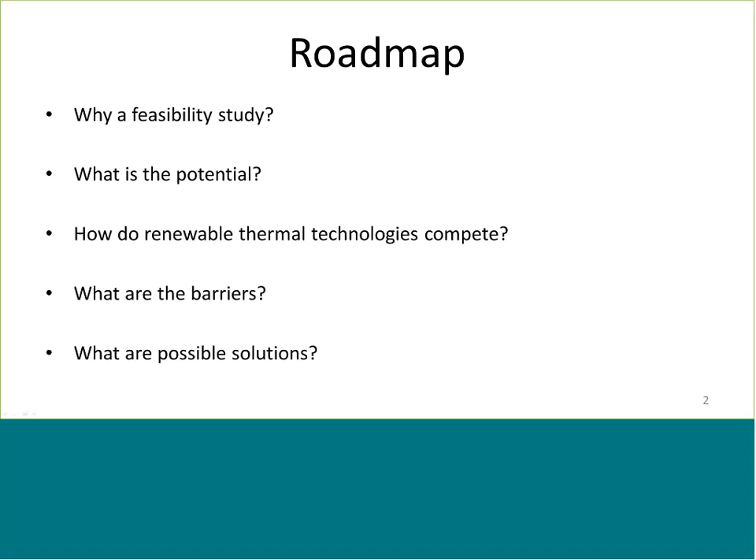This is an overview of the different aspects of the study, and I will walk you through the three parts. So the first part of the study was to estimate the technical potential. How big is the thermal demand today and projected till 2050? In other words, trying to estimate the size of the cake to be shared among the different thermal technologies.

The second part is estimating the economic potential. Letting the thermal technologies compete and figuring out which are most competitive from an economic perspective, and what is economically feasible given this competition analysis. And we have included 7 different customer categories into this analysis.

And in addition to that, we have tried to map different barriers and drivers that can restrict the economic potential. These are both economic but also non-economic barriers. And just to say where the reports are oriented, the quantitative part of the study is documented through the market potential report, and the barriers and drivers are documented through the field study report.

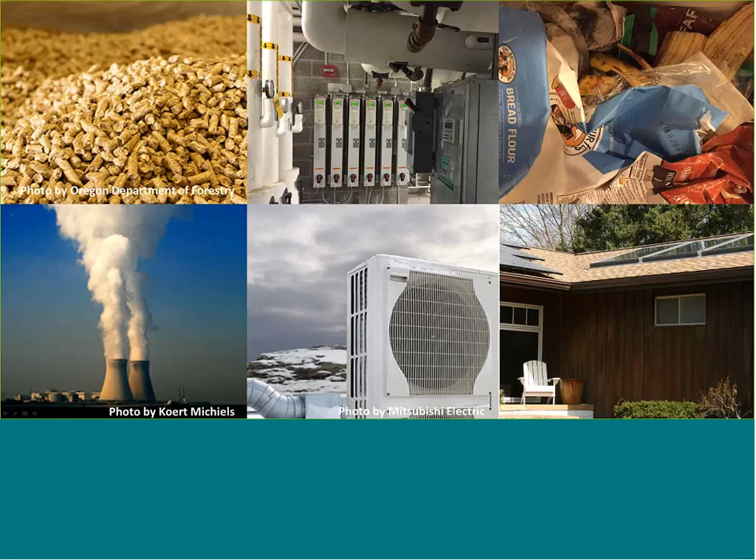The technologies that we have included in our case studies include air source heat pumps for space heating and cooling, both with and without costs of ductwork. We have included air source heat pump water heaters. We have included ground source heat pumps for space heating and cooling, solar thermal for hot water supply, and biomass represented by pellets.

In the project, we have defined renewable thermal technologies as technologies that harness renewable sources to provide heating and cooling services. This means that other solutions than those that we have included in the competition analysis are also available. And I would like to say a few words on that.

Our analysis has focused on decentralized solutions, but I would also mention that thermal grids represent an opportunity for further studies and deployment strategies. That's why I also included waste as an example in these pictures, and also power generation. Because thermal loops could facilitate the utilization of waste heat from waste incineration and industrial processes.

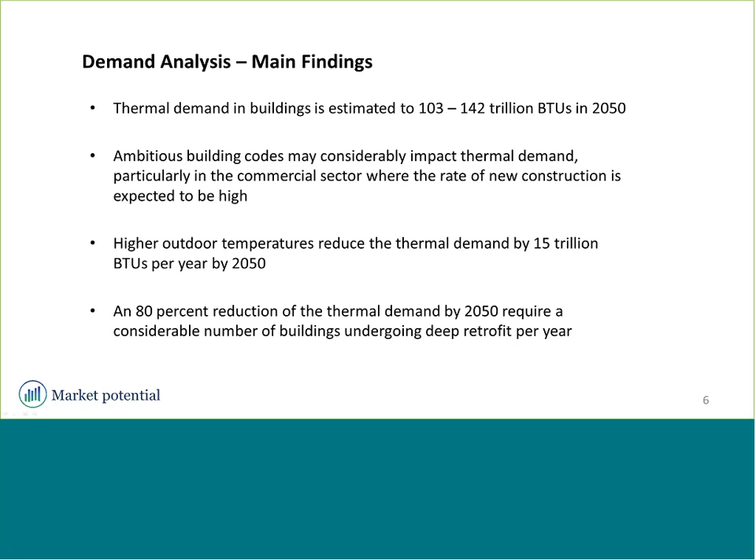And we have tried to estimate this rate and found that between 5 and 5.5% of the building stock would have to be deeply retrofitted per year. And then we have defined deep retrofit as reducing the thermal demand by 75%. And this would be a very high, or it would be a high rate.

Third, a sensitivity analysis assuming that all homes undergoing retrofit are deeply retrofitted is included. And as I said earlier, we assume that by deep retrofit there is a 75% reduction in the thermal demand. And fourth, we have included the minus 80% path. And with the exception of the 80% path, we can see that the deep retrofit path shows the lowest residential demand projections for 2050.

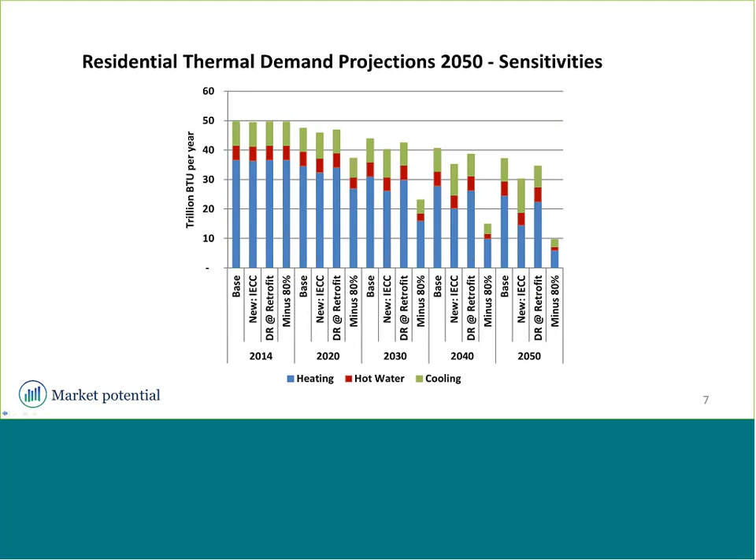And because the analysis assumes a higher rate of new construction in the commercial sector, a stricter building code will make a large difference, resulting in a thermal demand that is 19% lower than in the base case. But I still would like to claim that even with strict building codes and a high rate of retrofit, there will be a large thermal demand in 2050, which represents a potential for renewable thermal technologies.

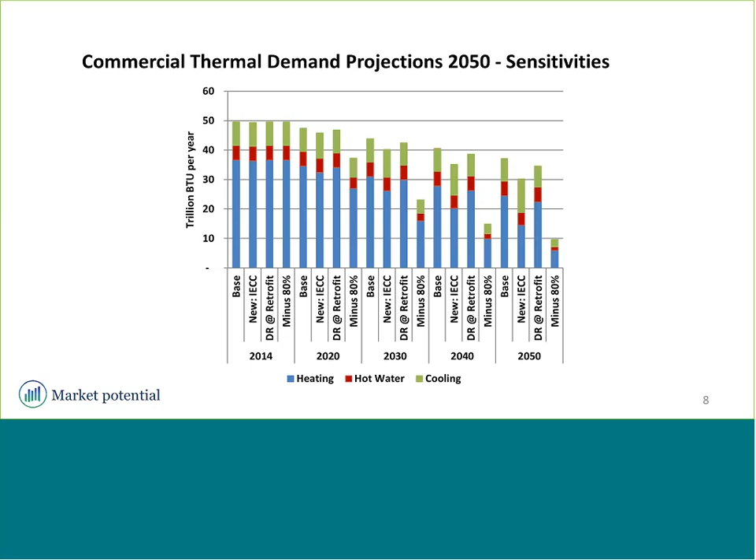Before I go into details on how the various renewable thermal technologies compete with the conventional technologies in today's market, I would like to give an overview of the procedures that we have followed through the study. We have started out finding the financially most competitive technologies for 7 different archetypal customers, and I would like to mention those. It's single-family home, apartment building, education, food service, healthcare, hotel, and office.

And for all of these 7 archetypal customers, we have calculated the net present value for different combinations of incumbent technologies and proposed new renewable technologies. And the incumbent technologies that we have included are fuel oil boilers, standard natural gas boilers, and conventional electric technologies. And on the renewable thermal side, we have included air source heat pumps, both with and without ductwork. We have also included a case where we look at air source heat pumps for water heating in the residential sector.

We have included ground source heat pumps, solar water heating for hot water, biomass pellets for space heating and water heating, and in addition to the renewable thermal technologies, we have also included highly efficient natural gas boilers as an alternative. And after having done the competition analysis and found out which alternatives are most economically favorable, we have used the technical potential to split the demand between the various technologies.

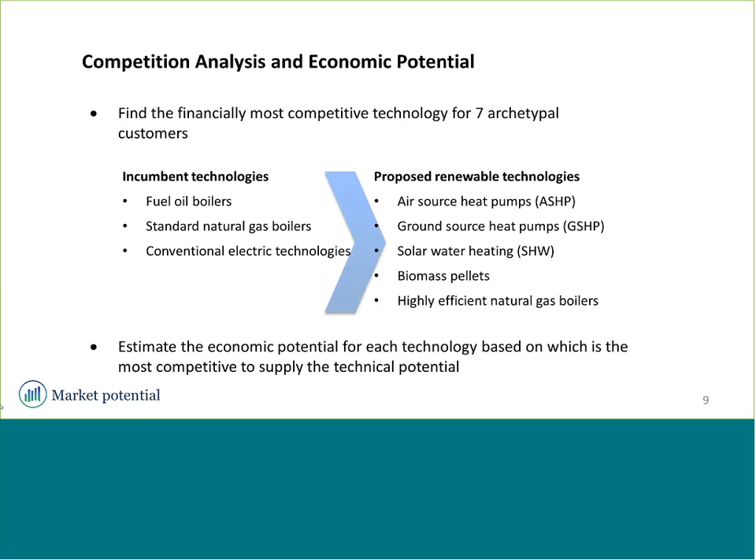I would also like to mention that our analysis does not include existing financial incentives. We have chosen to include financial incentives as part of the sensitivity analysis.

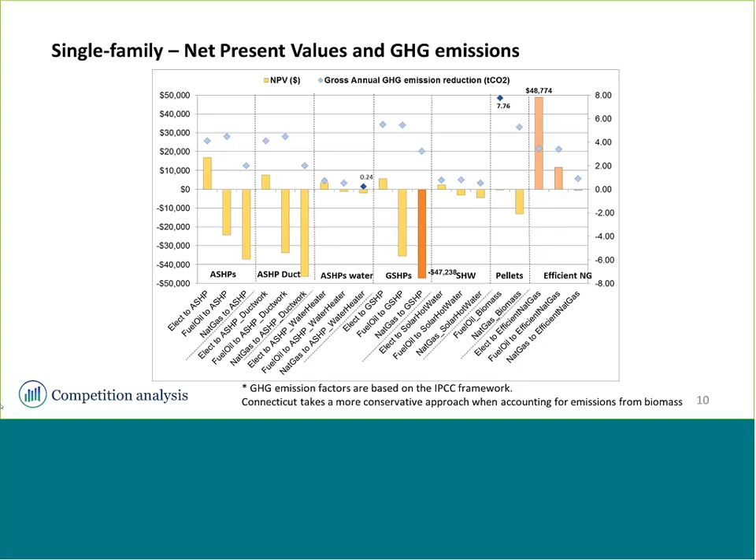And you can see that heat pumps and solar hot water as an alternative to the conventional electric technologies have positive net present values. However, the graph also shows that the renewable thermal technologies will struggle more to be competitive to fuel oil and natural gas. You can see that on the bars that go below 0. Highly efficient natural gas boilers, though, seem to be competitive. And as the biomass pellets alternative appears with a high number of reduced greenhouse gas emissions in this diagram, I would just like to mention that these numbers would be lower if the method that DEEP applies was used.

This overview of the operational fuel costs for heating provides an insight into why the different alternatives turn out with a negative or a positive net present value. For the net present value of a renewable thermal project to be positive, the operational cash flow of the renewable alternative has to be higher than the operational cash flow of the incumbent alternative. Otherwise, it would be hard to pay back the installation costs, which often tend to be higher for the renewable thermal technologies than the conventional thermal technologies. And this is what makes this illustration interesting.

The operational fuel cost, and what we mean by that is we have the price of the different fuels, and we also take into consideration the efficiency of the various technologies. And you can see from the operational fuel costs of conventional electric technologies, here shown by the blue solid line, that conventional electric for heating is expensive. And it's so much more expensive than the other alternatives that replacing electricity for thermal purposes makes economic sense. You could also see if you install an air source heat pump, the operational fuel costs would go down, here shown by the blue dotted line.

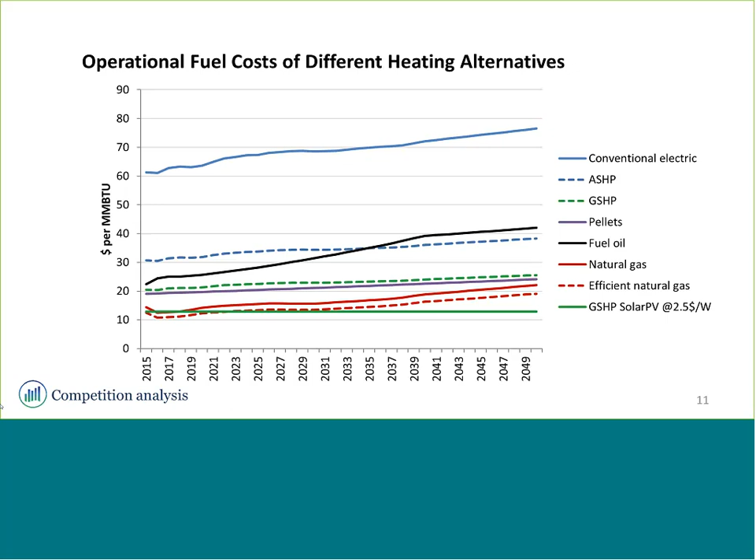This slide shows the results from the competition analysis for all 7 archetypal customers. And just to repeat which those are, it's a single family home, the apartment building, education, food service, health, hotel, and office. But I would like also to add some explanation to the table. The first column shows which renewable thermal technology is being studied, while the second column shows the incumbent technology that is being replaced. The cases with positive net present value are marked green, and basically show where the renewable technology is financially competitive to the incumbent.

And we can see that heat pumps generally are financially favorable to conventional electric technologies. We could also see that pellet boilers replacing fuel oil are financially competitive in several commercial sectors. And if we look at the result of this competition analysis and relate it to the technical potential, we estimate an economic potential for renewable thermal technologies in the current market of 19%.

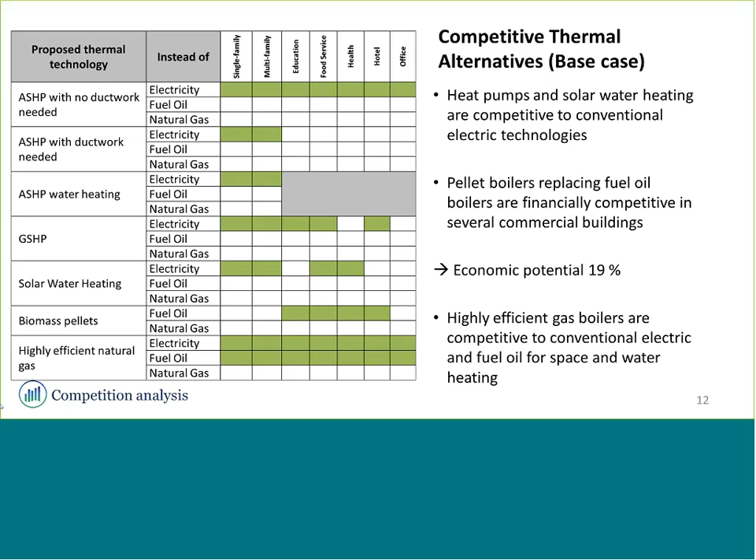In the next couple of slides, we have analyzed the greenhouse gas emission implications of 3 different scenarios, starting out with the residential segment. And we can see from this diagram that a variety of different measures, energy efficiency, a high deployment of renewable thermal technologies, decarbonizing of the electricity, as well as the deployment of highly efficient natural gas boilers are necessary to reach the 2050 targets of greenhouse gas emissions, which are shown by the lower orange line.

The current greenhouse gas emissions has been estimated to 9.1 million ton in the residential sector, and by applying scenario 1, which means that we introduce all the renewable thermal technologies that are competitive today, we could achieve an immediate reduction of 0.6 million ton CO2. And this scenario would follow the red solid line.

If we include the competitive efficient gas boilers and let them first take the market where they're most competitive, and then also add the competitive renewable thermal technologies where the gas boilers have no role, an immediate reduction of 2.4 million ton CO2 could be achieved. So that would follow the blue solid line and be represented by the number 2.

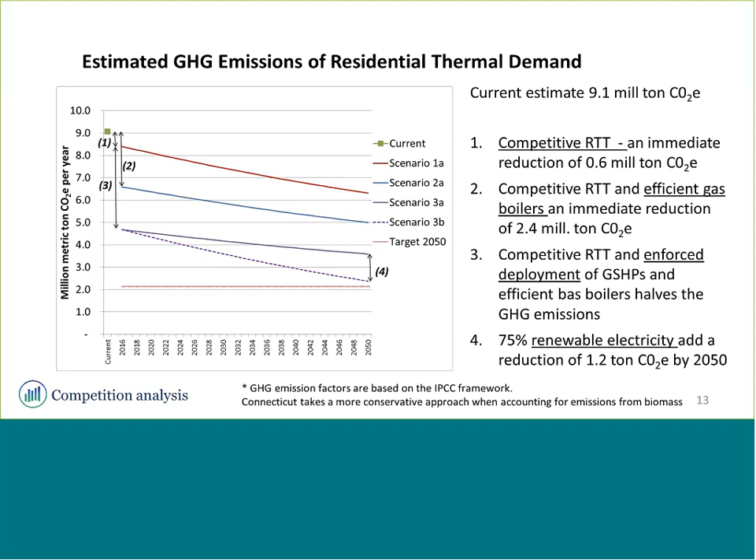If we, in addition to that, decarbonize the electricity grid and assume that there's 75% renewable electricity being applied, that would add a reduction of 1.2 million ton CO2 by 2050, which would bring us close to the target. But just highlighting that a variety of different measures would be necessary to get to the target, which would also imply deploying technologies that are currently not competitive from an economic perspective.

Achieving the 80% target is even more challenging in the commercial sector, as can be seen from this graph. And one reason for that is the high share of natural gas, which would make it harder to make the economic case for change. And the current greenhouse gas emissions for the commercial sector is estimated to 3.5 million ton, and then we have done the same exercise for commercial sector as for residential sector, where we first introduce a scenario representing all the competitive renewable thermal technologies, which would give an immediate reduction of 0.8 million ton CO2, represented by the number 1 in the graph.

And then we have also established a scenario 2, where the highly efficient natural gas is also allowed to compete for the technical potential, and that would give an immediate reduction of 0.7 million ton CO2. If we in scenario 3 replace the remaining fuel oil with ground source heat pumps, and then switch all the standard natural gas boilers to highly efficient natural gas boilers, we would follow the pink path and scenario 3, which would bring the greenhouse gas emission to 65% of what it is currently.

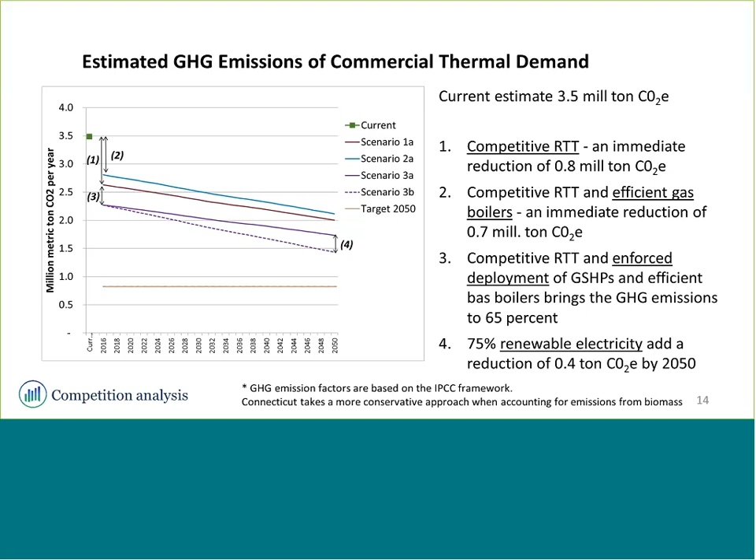As we can see from this diagram, some parameters influence the net present value more than others, and that's particularly the case for the fuel costs. That really makes a difference. And we have done several sensitivity analyses looking into fuel costs, increasing the costs for the incumbent technology, reducing for the new technologies. We have looked into a case where we look at heat pumps in combination with solar PV. We have also done sensitivity analysis around the initial cost, a 25% reduction.

We have studied part load strategies where the installation for renewable thermal is lower, and we let the incumbent technology deliver heating on the coldest days. We have also looked into some alternatives around thermal renewable energy credits, similar to what they have in Massachusetts and New Hampshire. And then also a carbon price of $41 per ton, which represents the social cost of carbon estimated by the interagency working group. We have looked into different financial structures, debt interest rate, debt terms, and then last we have looked into various combinations.

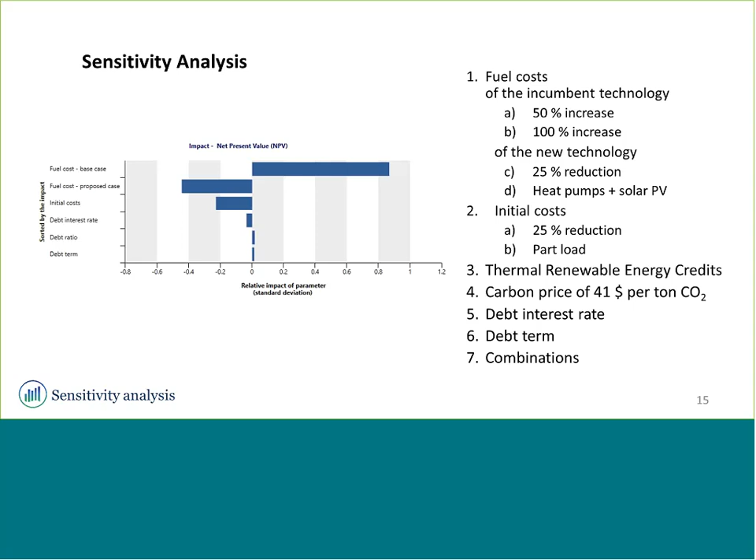And I would like to show an example from the sensitivity analysis, and this is a diagram where we have a combination of different measures at the same time, and we can see that this combination will improve the competitiveness of the renewable thermal technologies. A small explanation to the diagram.

The green cells represent the alternatives that were competitive in the base case, and the orange cells indicate the cases that turn competitive with the changes that we have made in the parameters. And in this case, we have reduced the initial installation cost by 25%. We have assumed that the electricity costs of heat pumps are lower through the installation of solar PV. So we have reduced those costs by 25%.

And we have assumed that the fossil fuel costs are 50% higher. And just to add as a historic note, the average residential fuel oil prices increased by 50% from 2009 to 2012, and in 2015 the fuel oil prices were down 2/3 of what they were in 2012. So you can see that the fossil fuel prices traditionally have been volatile.

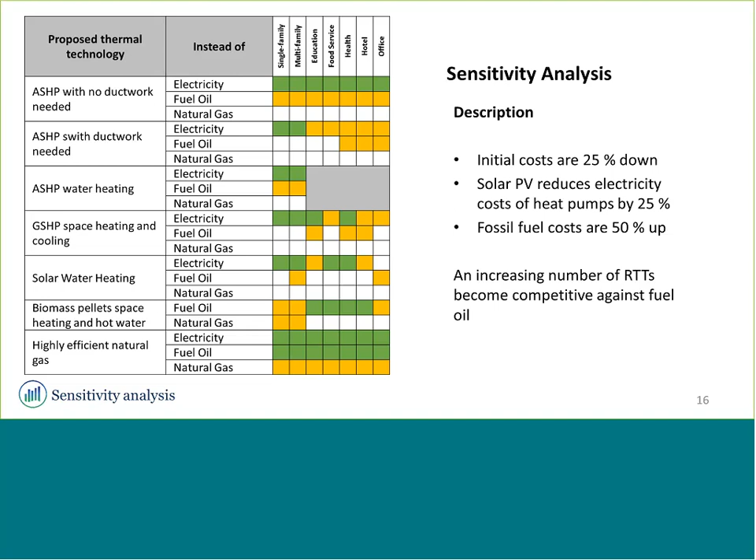So now I want to turn to a broader picture of challenges faced by renewable thermal technologies. The field study that we did supports the finding of high upfront cost as one of the main barriers to renewable thermal technologies. There are two aspects to that barrier: one is the issue of renewable thermal technologies having higher installation costs than the conventional alternatives, and the other is the need for large capital outlays upfront.

As one of the institutional customers put it, we cannot afford to pay extra for environmental value, and the project has to be zero out of pocket. Another issue that was mentioned by a few residential customers was a tax rebate or an incentive that's credited at a different time than when they have to pay for the installation. The problem is when you put everything up on your roof, there's an outlay of money and you're cash poor until the tax rebate is returned.

And I would like to mention some strategies to break down high upfront cost in the next slide, using the single-family home, replacing conventional electric by ground source heat pumps. In the upper left-hand corner, we can see the base case with a positive net present value of almost $6,000. You can see the annual cash flow over the lifetime of the technology. And you can see in the base case that the customer has to raise quite a bit of money up front in order to achieve the benefits coming later.

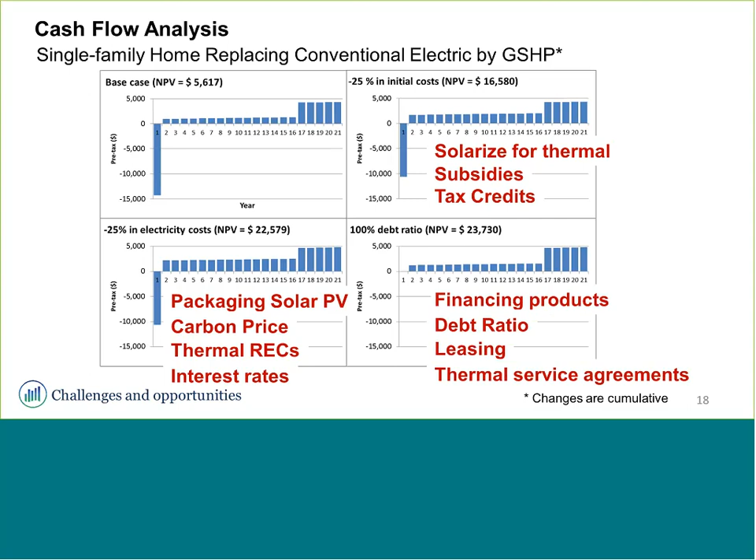And what if you, in addition, have a 100% debt ratio, or say that the cash flow shall always be positive? That can be done through different financing products such as the debt ratio and leasing, but also various business models such as thermal service agreements.

So far, the focus of the presentation has been on the economic barriers. However, there are also a set of non-economic barriers, and I will mention the most important of those.

It seems like the renewable thermal technologies market suffers from a deficit of awareness, and we had the impression from the interviews that there is also a confusion between what a renewable thermal technology is compared to solar PV. And as one of the installers said, PV is killing solar thermal. The payback for solar thermal technologies with the tax credits is good, but it's not as sexy as PV, which also speaks to the issue of the so-called neighborhood effect as a driver for increased deployment.

But focusing only on economic issues might also be a drawback, because renewable thermal technologies can offer more than just energy, and this can be seen from a comment from one of the program administrators. When we talk to customers after the fact, they never talk about energy savings. They are always thrilled about how comfortable and quiet the home now feels. It's an interesting transformation. Forget the savings, we know how comfortable our home is.

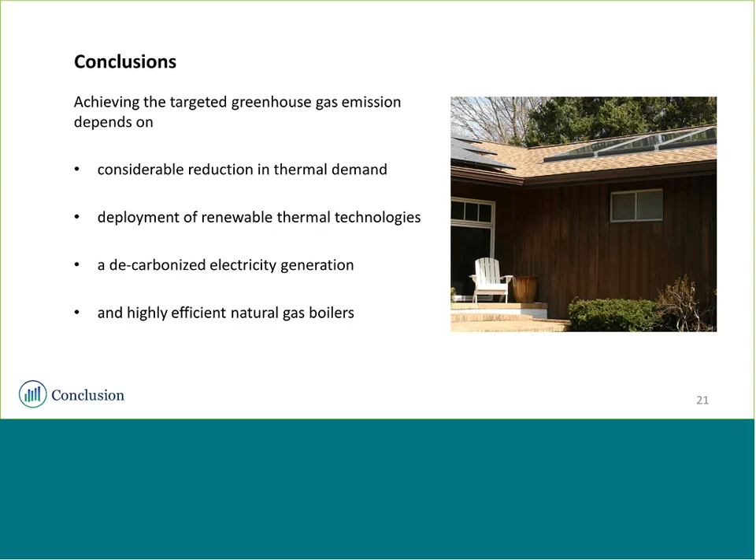A decarbonized electricity generation: we have particularly taken interest in the combination of heat pump and solar PV, both for the greenhouse gas emission impact and for the potential economic impacts of it, but also some highly efficient natural gas boilers.

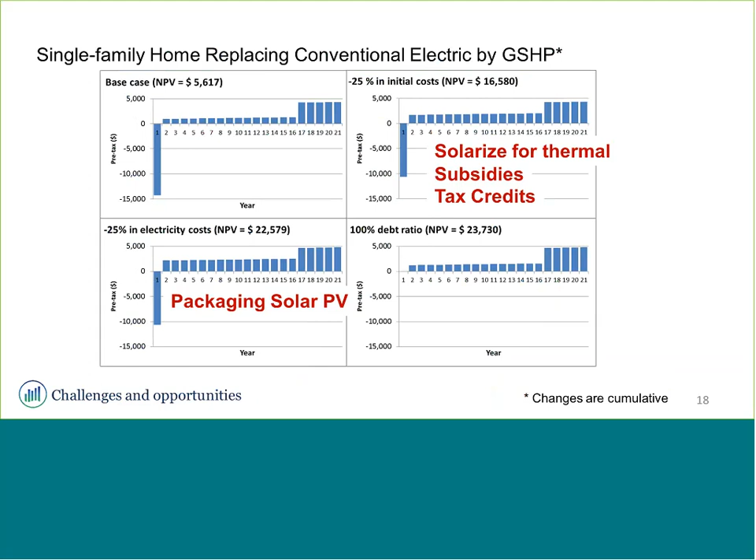Well, what we have assumed in our analysis is that the thermal technology covers the whole load of the building, but we are well aware that you have smaller units that can deliver heating and cooling to parts of the building, for instance, single rooms or more rooms, but still not the whole building. So that's why I said we didn't include the smaller units, which could be easier to install and implement than the whole load solutions.

Sure. Okay, great. And then there's just a clarification of the findings. Your presentation seemed to say that highly efficient gas boilers will be a better financial choice for most property owners transitioning from existing gas or oil boilers. Is this correct? Yes, that's what our net present value analysis shows. Not necessarily competitive to standard natural gas boilers, but fuel oil, yeah.